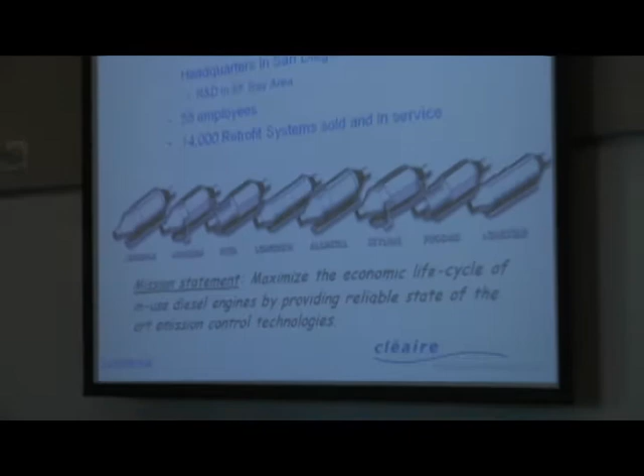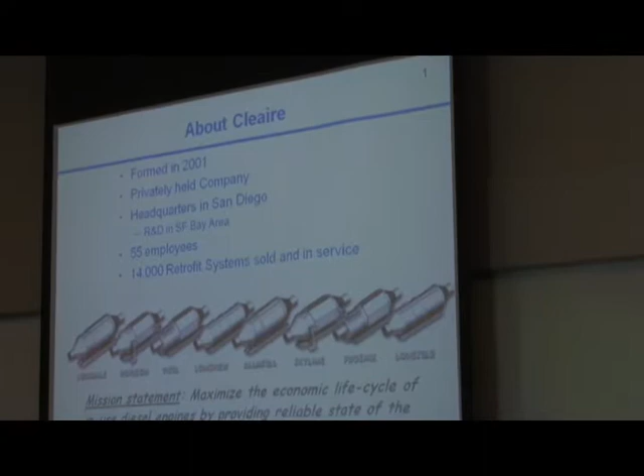Just a list of our products. We lead the retrofit industry with the verifications that were mentioned. That is the gateway to be able to sell. It's an approval from the Air Resources Board that the products are viable, durable, and robust.

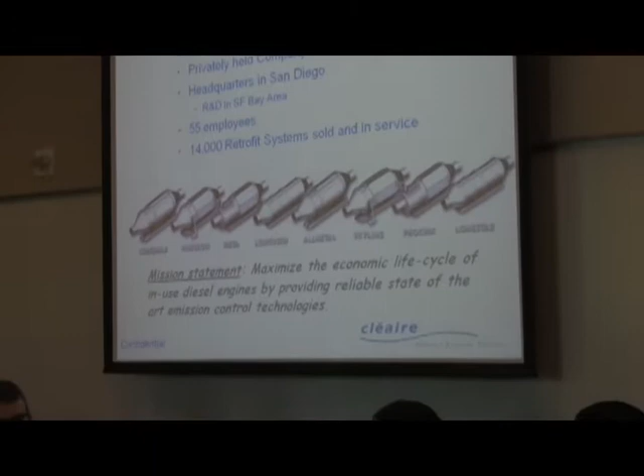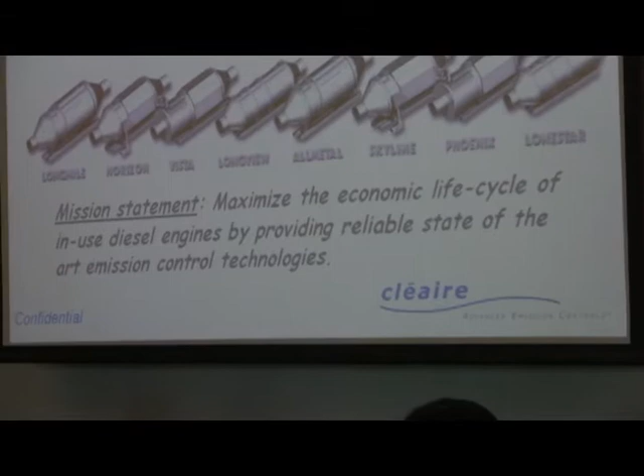I think it's worth mentioning the mission statement because it's important. We fall between, and sometimes in an awkward spot between, the owner of diesel equipment who wants to continue doing their job as usual, and the air quality side that wants to clean up the air. Our mission actually covers both. We want to maximize the useful life of the engine or vehicle by providing state-of-the-art technologies.

Construction equipment is very expensive. It can range, as shown in the picture I'll show you, between $100,000 up to $1 million. So very expensive capital outlay to do construction work. What we offer is a very cost-effective solution to allow that equipment to run its useful life while ending its emissions life. So we clean up the emissions but let the equipment run, and that's really what Cleaire is all about and what retrofit technology is all about.

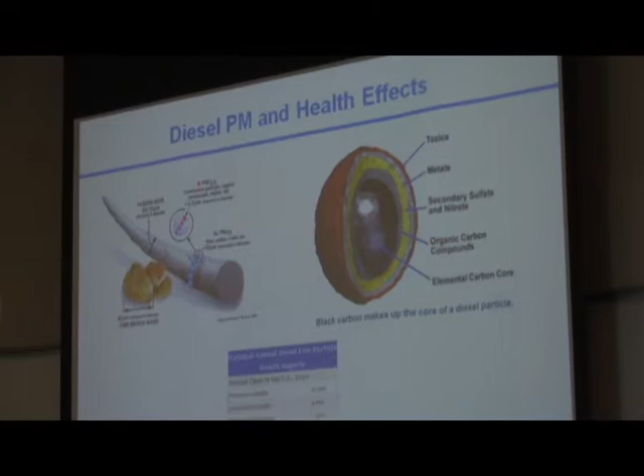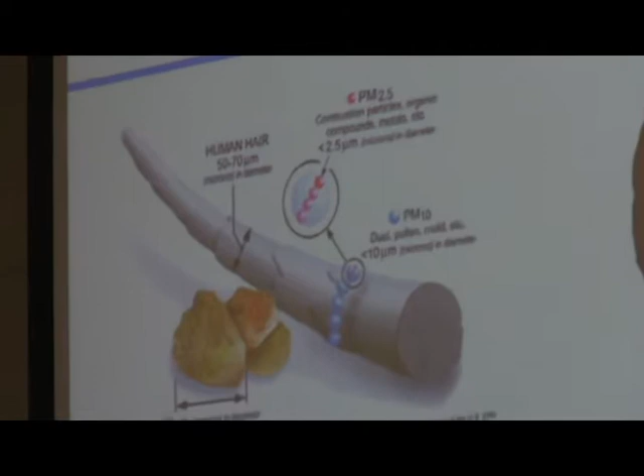A couple of slides on particles, just to put in perspective how small the particles we're talking about are. On the upper left is a slide showing a human hair and a grain of sand, and then the little blue spherical balls represent PM10, and the red ones represent PM2.5. So you get a sense of how small these really are.

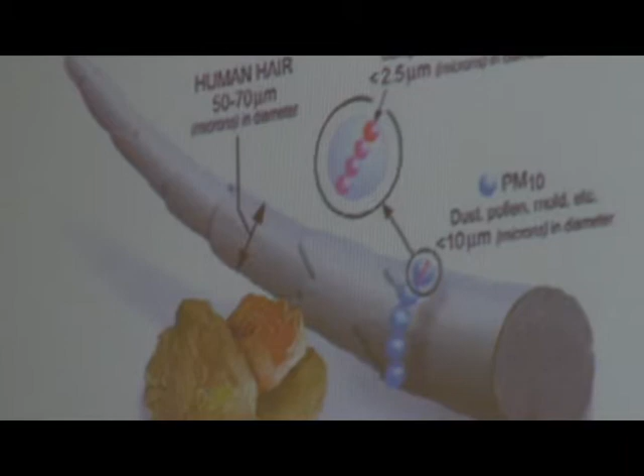You hear oftentimes that, well, my diesel engine isn't polluting because I don't see black smoke coming out. It's probably polluting even more. There are trillions of tiny particles coming out, so small they're not visible. They are the ones to be more concerned about, frankly, because the visible ones will fall to the ground. The smaller ones stay airborne and travel further distances and can get through the body's natural defenses like your nose and upper trachea, getting down into the bloodstream. So very, very small particles.

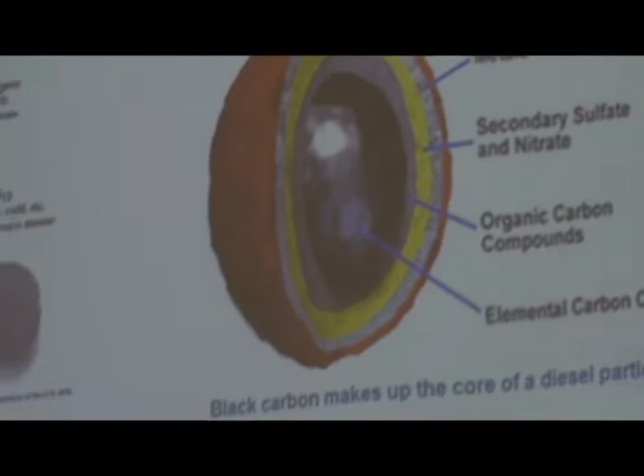On the right is a depiction of a particle. It's not just a piece of carbon, although that's an important part, and I'll talk about that more in a little bit. But these are carriers for lots of other things that are unhealthy: toxics, which tend to be hydrocarbon-based, metals, sulfate and nitrate byproducts of the fuel, and ultimately the elemental carbon core. So there's a lot of stuff in a diesel particle. None of it's very good for you, so getting rid of it is the desired thing.

The experts who know a lot more about this than I do have recorded a lot of health impacts on an annual basis because of diesel PM. The numbers are high, so the driver to reduce the pollutants is high.

I was going to make one more comment on the last slide and this slide. A lot of diesel particulates, we get in our mind that they're just this little tiny black ball, but the reality is there's a lot of surface area to them.

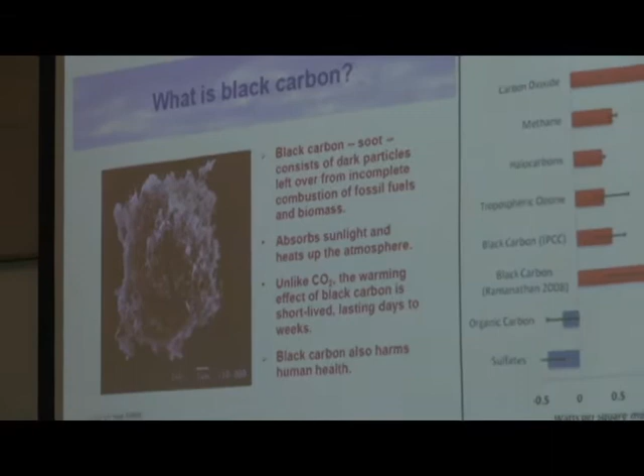Since it's Halloween, a funny story: a few years ago we had a company Halloween dress-up day. We don't do that anymore. But one of our engineers came as a diesel particulate, and he glued black balloons all over his body to show this surface area. It was an inside joke, but it went over well.

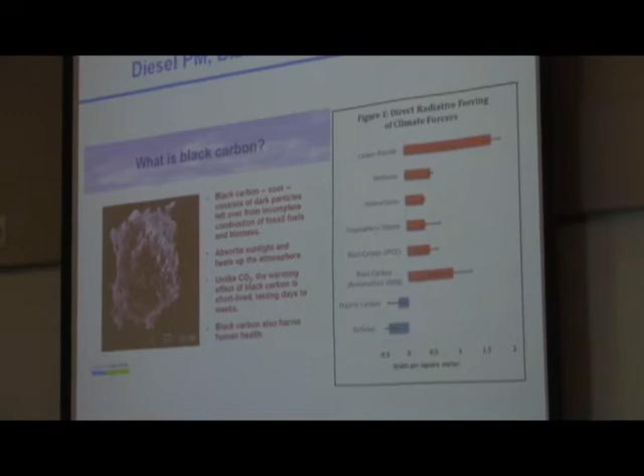But there's another co-benefit to diesel particulate besides the health side, and that's black carbon. The impact of black carbon on climate change has really emerged in the last few years as it's proving to be a really strong actor.

CO2 is really the benchmark climate change greenhouse gas pollutant that people talk about, and that's somewhat of an unavoidable byproduct of combustion. The more fuel you burn, regardless of the type, the natural byproduct, and what used to be considered the clean byproduct, is CO2. That's still probably the primary cause. CO2 is very long-lived. Then you have methane and hydrofluorocarbons and other things that contribute.

Black carbon is emerging as a very strong global warming agent, primarily because of its ability to absorb the radiation wavelengths that contribute to warming. So the good news is the technologies to reduce diesel particulate, which is primarily comprised of black carbon, also take care of the climate change issue.

So it's a 2-for-1. And the other point is that the technology we use with diesel particulate filters filters out not only the PM10 and PM2.5 that has been regulated, but also the ultrafines. So the fact that the technology already exists today to go after ultrafines means that as the science around the health impacts of ultrafines becomes more known and regulatory frameworks evolve, you'll have a mature solution in hand should you choose to go after those. And you're getting ultrafine control today anyway.

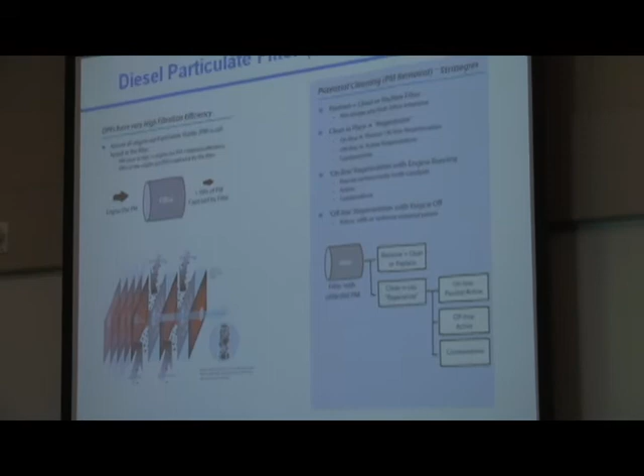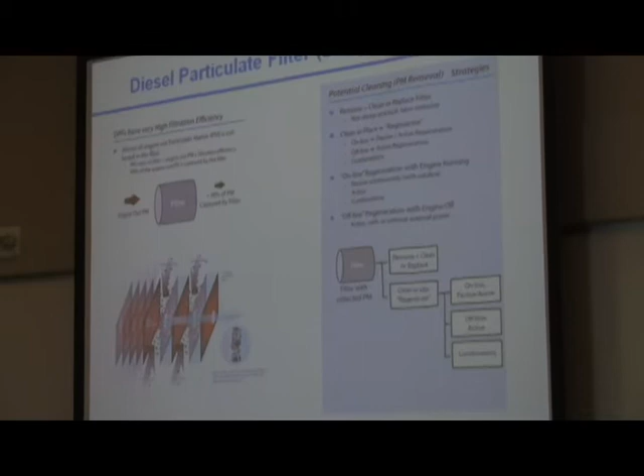It's generally combustible. It can be converted into CO2, which is relatively much more benign than the carbon. That requires a number of approaches, whether it's catalytic reactions to oxidize the carbon or thermal heating. We have products that use something as simple as an electric heater.

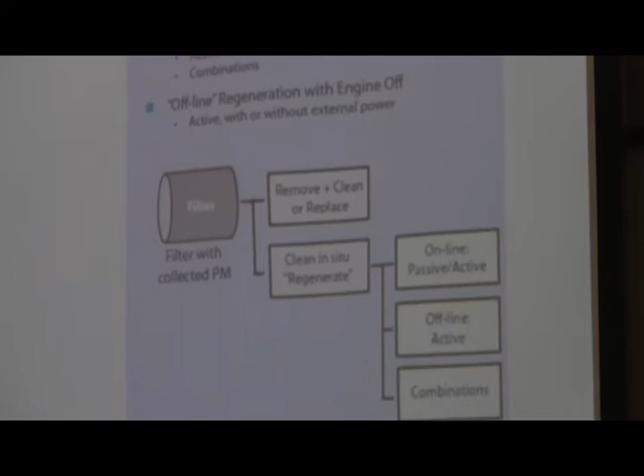You drive your bus or truck around by day, you fill up your filter with black carbon, and at night you plug into a wall. The utility rates are low, and over 4 hours you bake out the filter, much like a self-cleaning oven. So that's a very simple approach, but there's every step in the range from that simple collect-it-during-the-day-and-clean-it-out-at-night approach to collecting it on the go, which is what we call passive regeneration.

Without being asked, I'll say the cost of these devices tends to range between $10,000 and $20,000, and the first response is, how can something as simple as a filter cost that much? The answer is: one, it's designed to survive in a very tough environment, and two, the technology to keep it clean and manage the regeneration is really where the costs come in, because there's a lot of complexity to that.

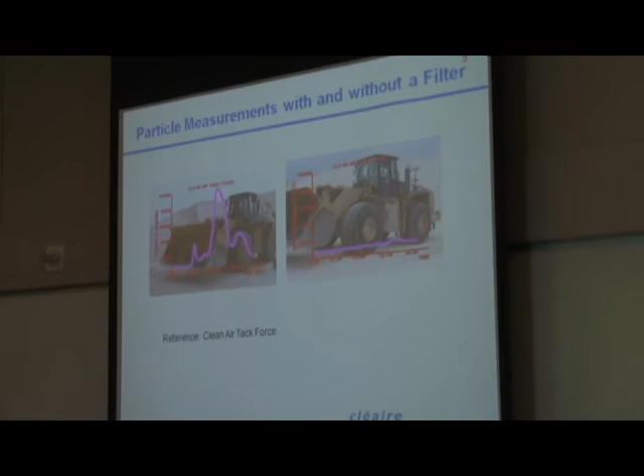These devices really work. There's an organization on the East Coast called the Clean Air Task Force, and they've done a lot of in-field monitoring of diesel particulates. They did a study looking at particle emissions from a piece of construction equipment with and without the filter. You can see the pink line on the left — the particle numbers over time are high. They're not constant, because as the engine works, more particles come out.

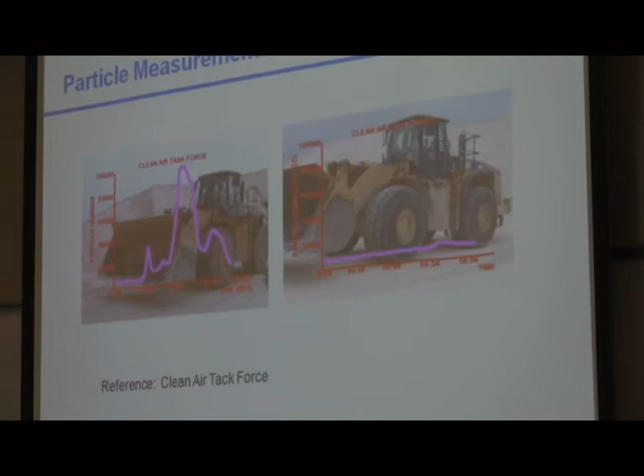So the left side is the baseline, the right side with the filter installed. You get near zero emissions afterwards. So very effective control technology.

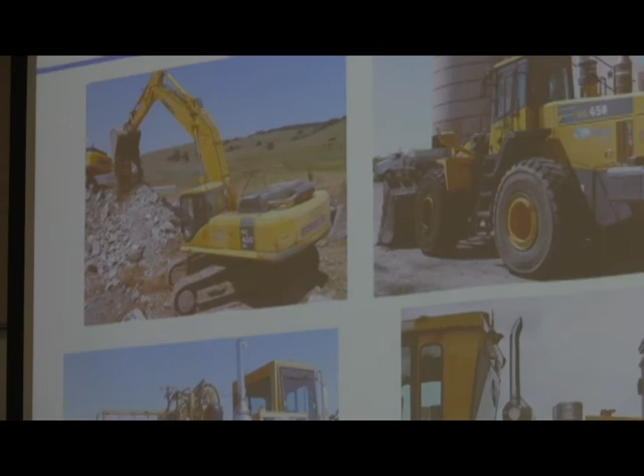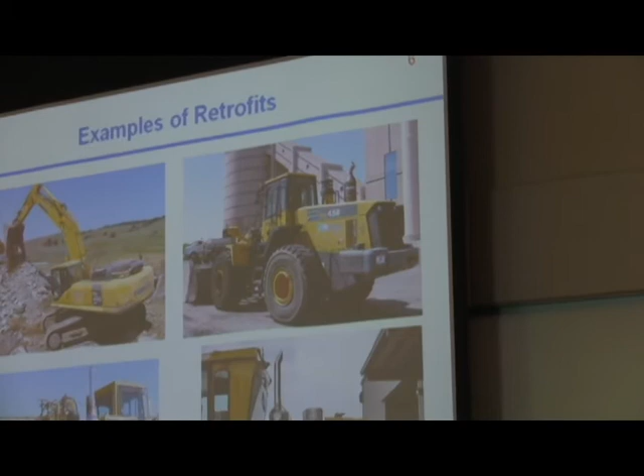I'll just show some pictures of the Cleaire installation portfolio. We've done maybe 1,000 pieces of off-road equipment. The on-road market has really been where the activity has been, with CARB regulations driving on-road retrofits starting as early as 2003, so the on-road market has matured. The off-road has come a little behind it, but we've done a number of pieces — these are typical types of machinery you'd see on a construction site: an excavator, a loader, a scraper.

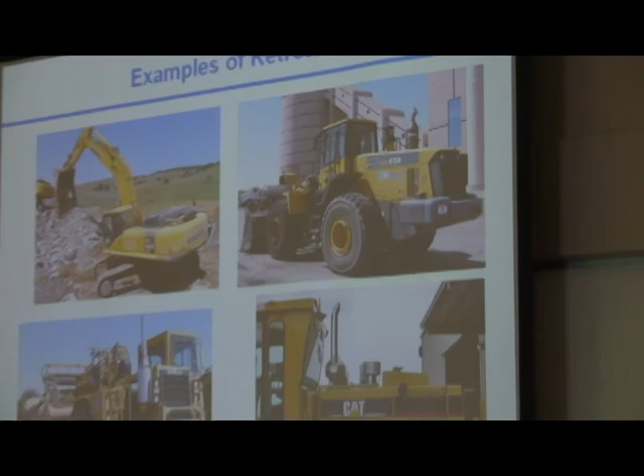These scrapers are the $1 million pieces of equipment that have a 20-year life. They work very hard. The technology hasn't evolved so fast that buying a new scraper allows you to do a lot more work than a 10-year-old scraper. So the good business operators in construction would like to keep their assets running as long as possible, and because of the high replacement costs, it makes sense to do so.

This is an example where retrofit makes a lot of sense, because buying the latest and greatest doesn't get you as much. On the right is a picture of the plug-in filter on a motor grader. That gives you a sense of the range of equipment that we can retrofit and that our industry can retrofit, and if you look at construction sites, these are very common types of equipment.

The last thing — I think other speakers will talk about this more — is what promotes retrofits: regulations. The Air Resources Board has been the leader. The plans to heavily regulate the off-road market have been delayed a bit because of the economic downturn, and also less near-term demand for some emission reductions. That being said, the regulations will start to take place in about 2 years, so when we say delay, we don't mean indefinitely, we mean 1 or 2 years.

In the meantime, local agencies, particularly South Coast AQMD, have programs in place to encourage early adoption of retrofits. There are also a number of local programs I'm eager to hear about today — the MTA is one that's adopting clean construction ordinances and similar measures to really focus emission reduction where the activity is. That is, when we're doing construction, we need to make it clean. You can't argue there's no economic activity just because you're doing construction work, so the cost of cleaning up is small relative to the overall cost of the project.